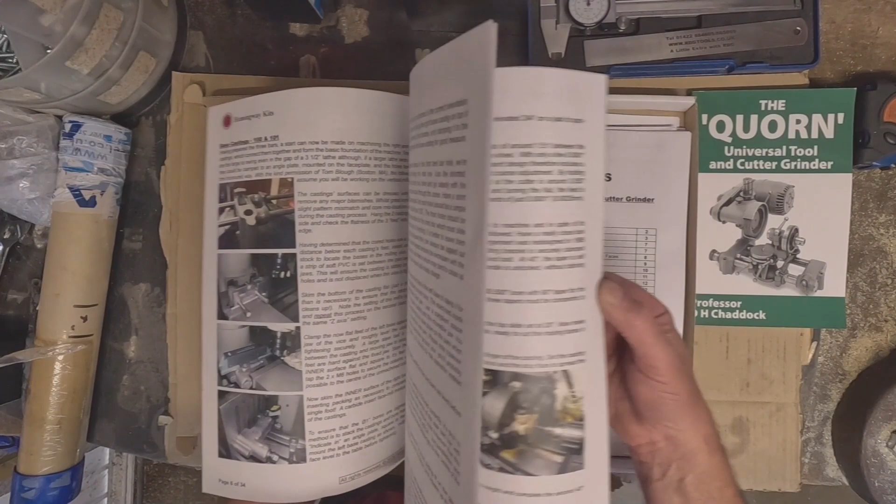So I went ahead during the end of lockdown to buy the kit. I'm glad it was inanimate objects and not something that needed walking or feeding, because it's sat there ever since. But anyway, we've got a full list of construction notes here to follow. I've had a quick look through, very extensive. I think you've got to read between the lines with some of these things. But we'll see how we go.

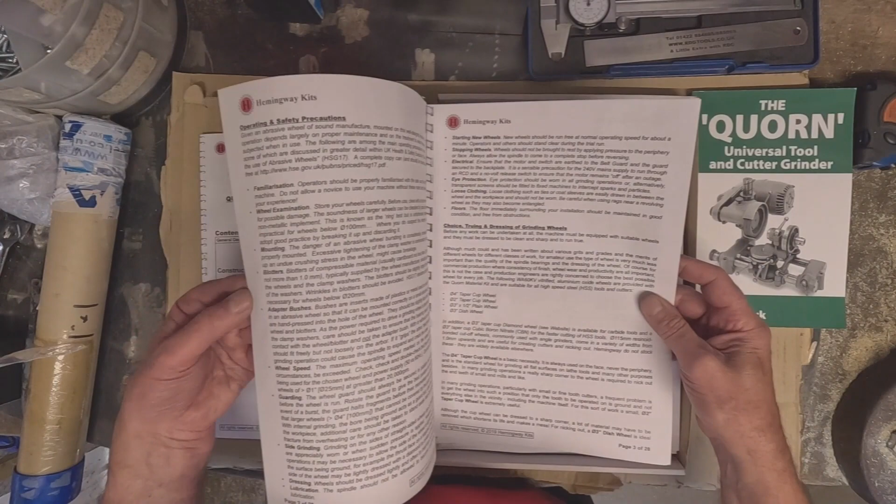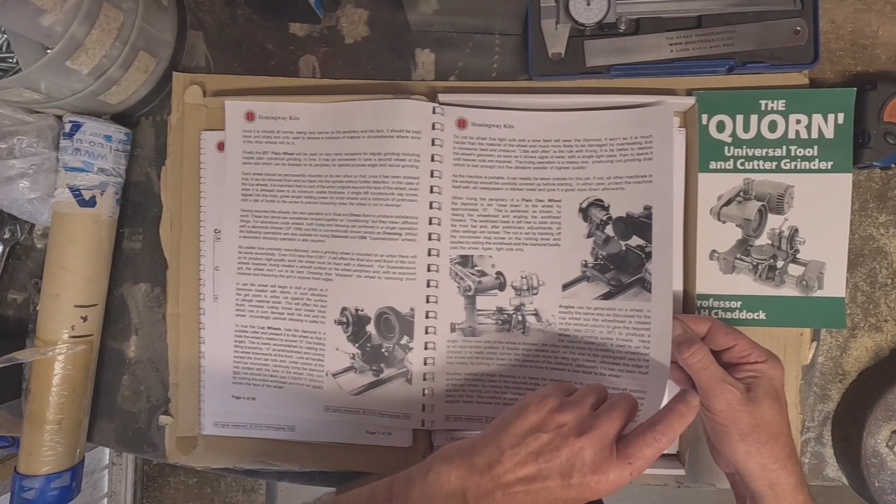We've got users notes. Obviously once you've built the Mark III Quorn, it's then going to run you through all of the operations of the Quorn, which at the moment look very complicated to me, but I'm sure some of it will come along. I've got plenty of high-speed steel to practice on anyway, and quite a collection of some old cutters.

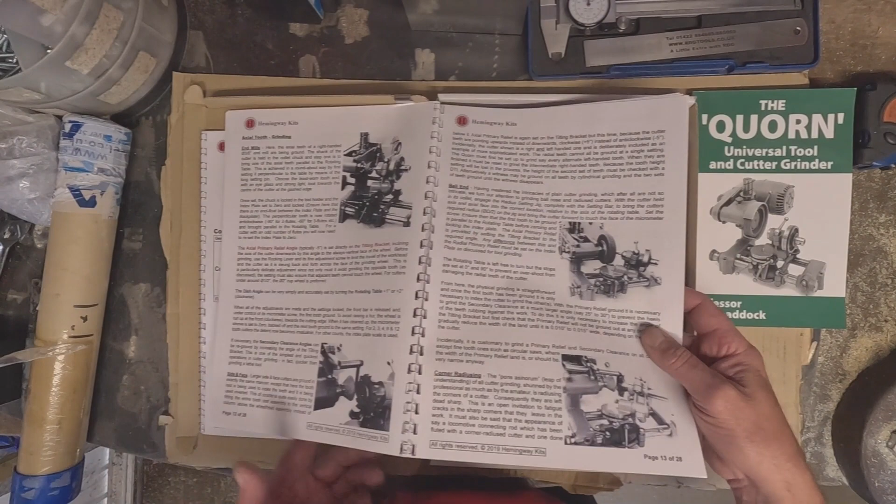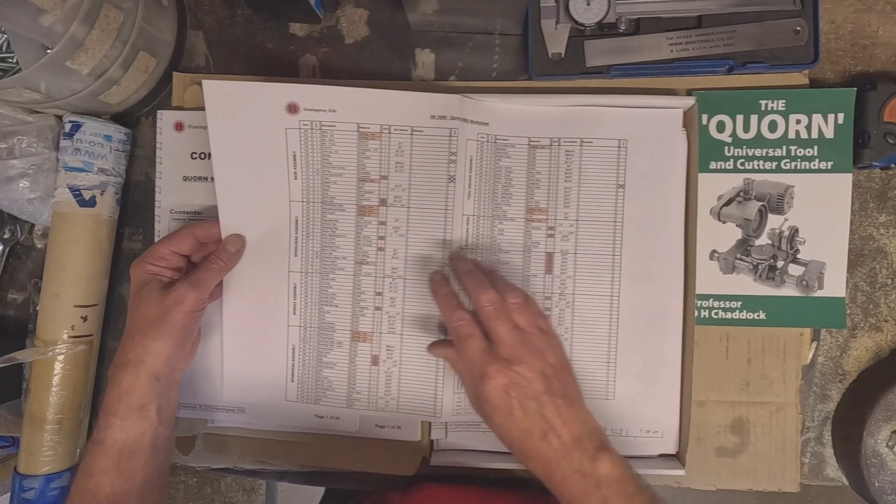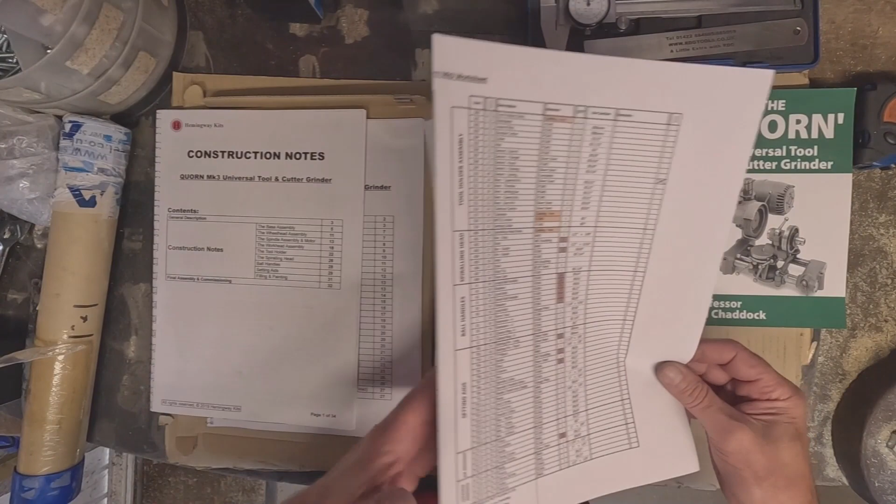You get a worksheet so you can mark down what you've managed to do, how you've gone along with it. I suppose you could put down your remarks, your time. I'm not going to go into the parts of the kit as such, because we'll just see them as they come along. Now the drawings are excellent.

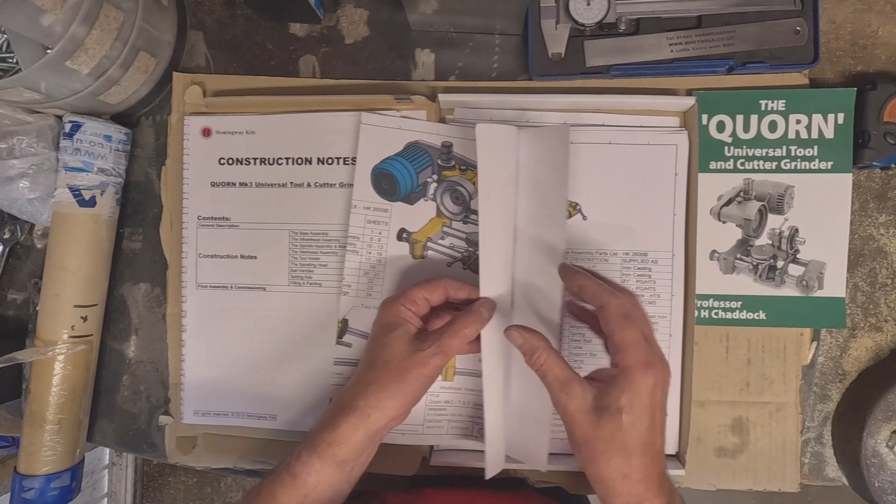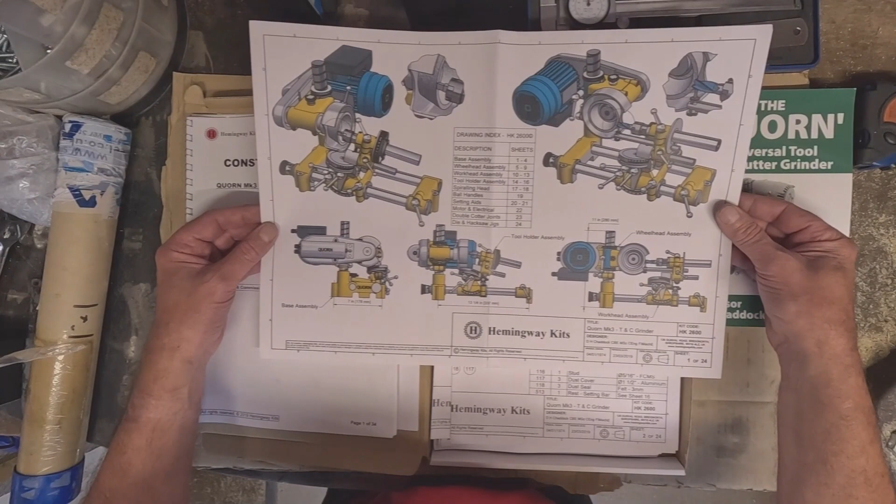There must be nearly 30 drawings. These are the full construction notes. I'm not going to show some of the more detailed ones, because these obviously belong to Hemingway, and if anybody wants these drawings, then please go and buy them. There are people out there that have put these things on the internet. I went and bought them. You're in a sense sponsoring them for their time and effort making up these drawings. Like I say, some of them are rather wonderful.

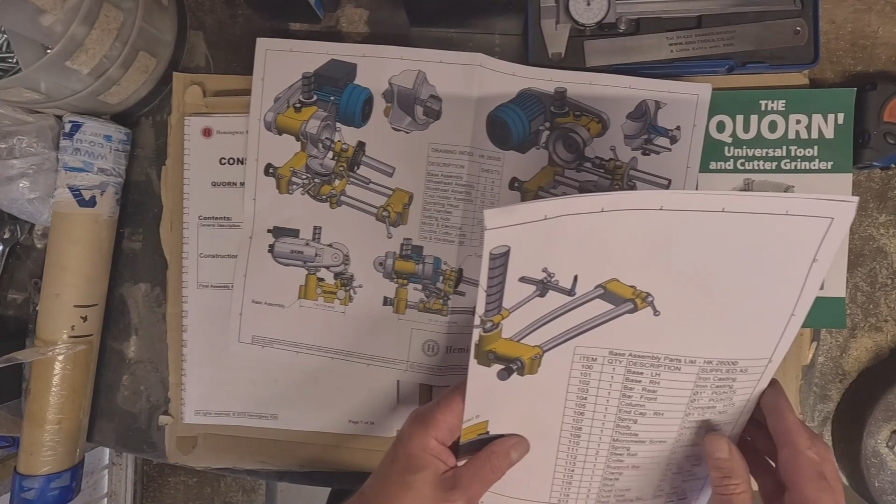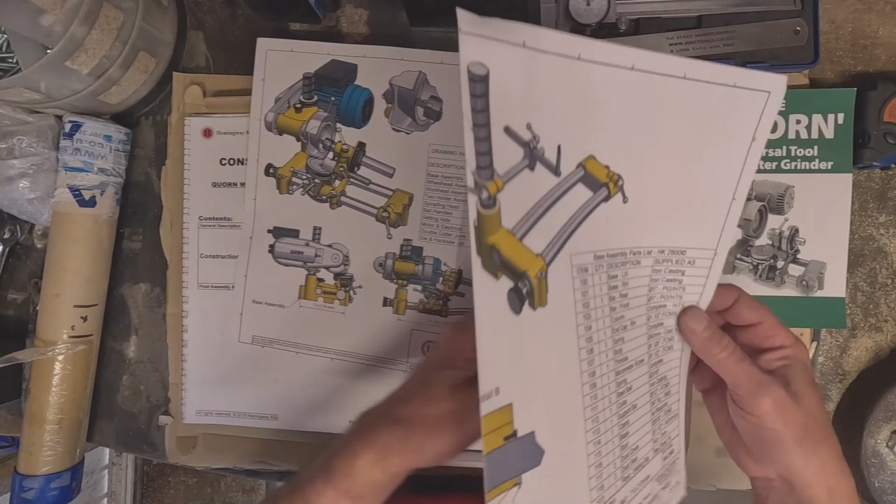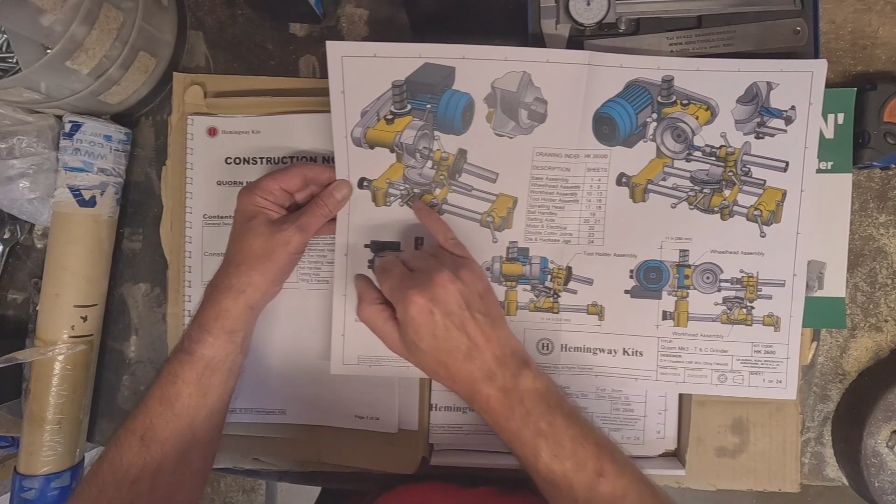Gives you an idea. This is with a different tool fastened on there, which again I will get into. But the first job is to start to do these bars. You've got a front bar and the rear bar, and the first two castings, these two here, is to prepare them by machining these inside faces underneath. Do the feet first to get them flat, and then the inside faces, and then you bore these bores out as accurate as you can for the two supplied bars that you get in the kit, that hopefully we'll get onto very shortly.

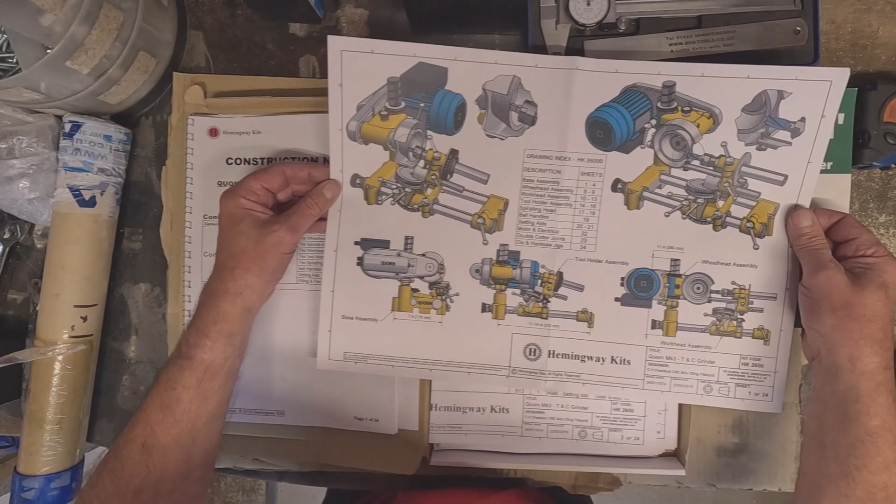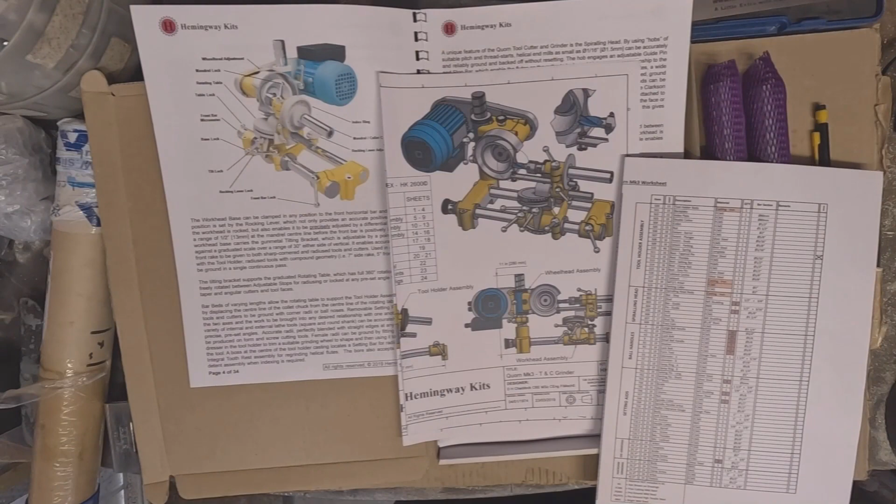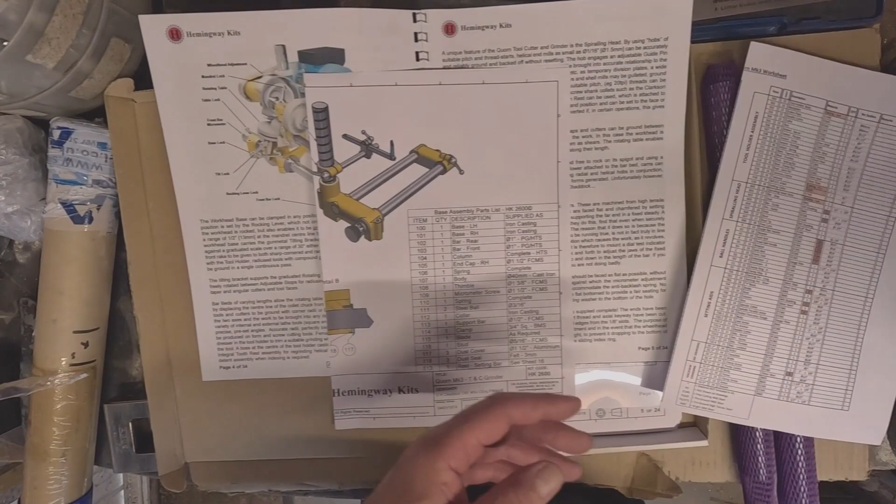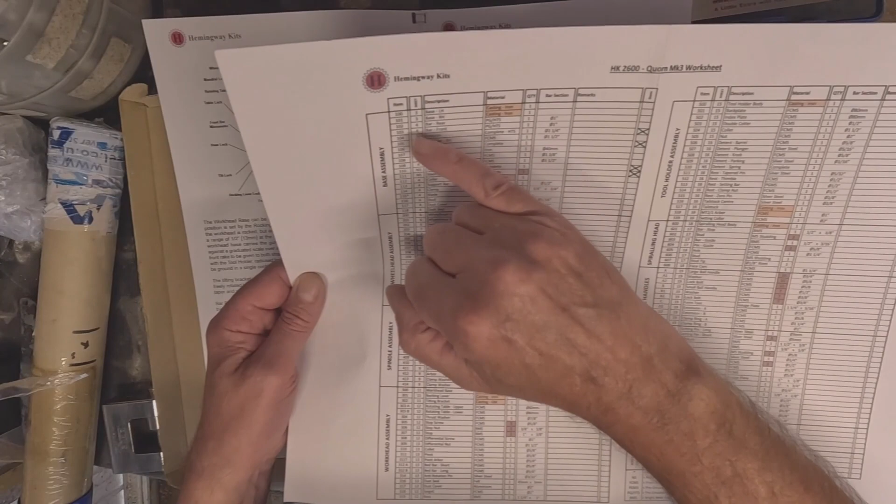Anyway, enough of all of that. I want to start to create, so let's see how we go. Right, it's time to make a start. So this is the first drawing that we get of the full assembly, which is all well and nice, but the first thing that is asked for are the base assembly bars. Now what I do like is on your notes, as well as the item numbers that are listed in the instructions, it does tell you which sheet they're on as well, because it's a bit of trawling through everything to find the part you're actually looking for.

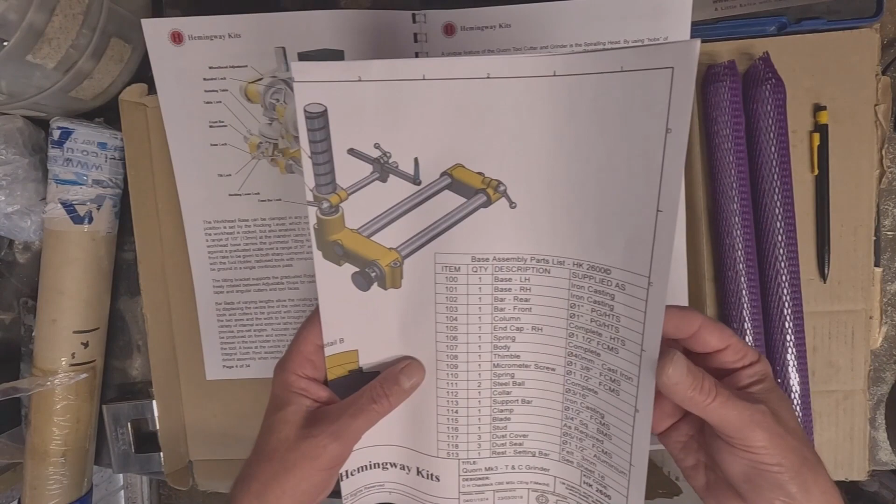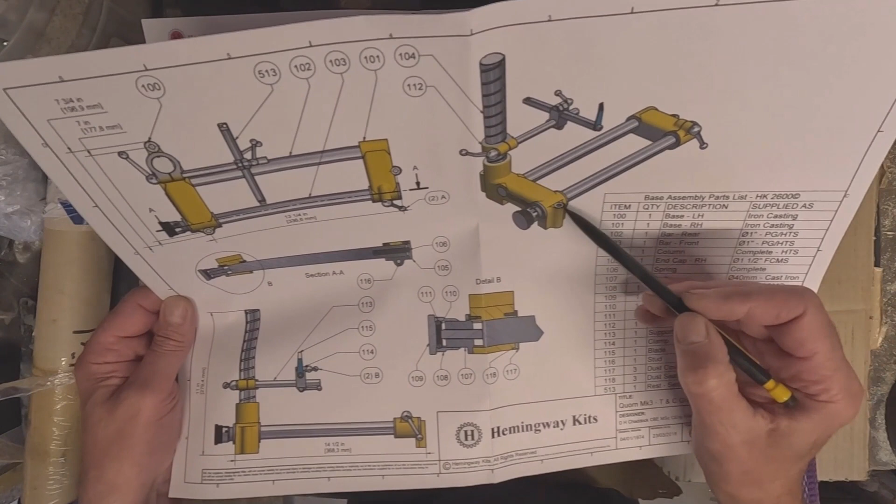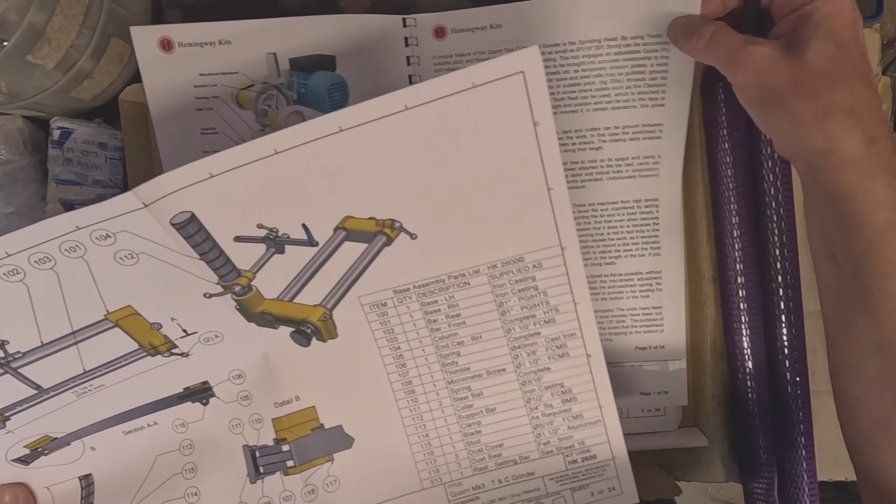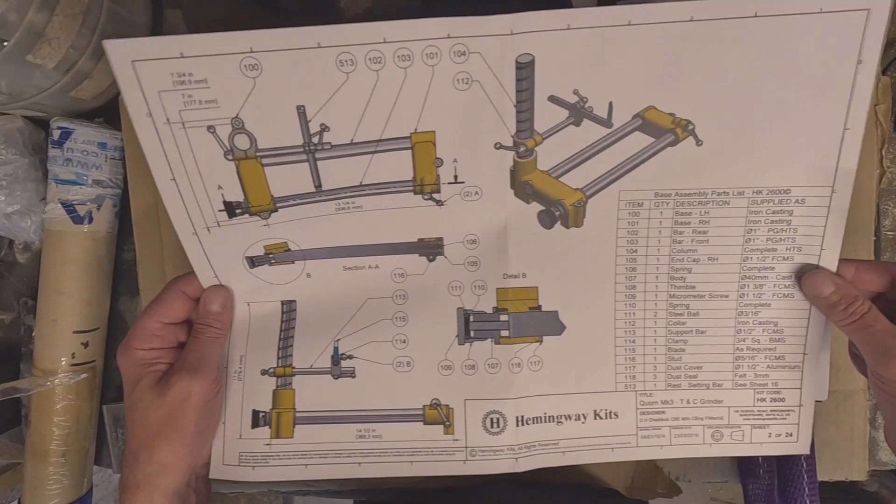Now, like I say, some of the drawings I'm not going to show because they belong to Hemingway. But what we're going to do, this is the rear bar and this is the front bar. These two are made out of ground precision 1 inch. I think they quote it as silver steel. We'll have a look. Yeah, ground stock, high tensile. High tensile, could be silver steel, same thing near enough. Although someone will probably say different.

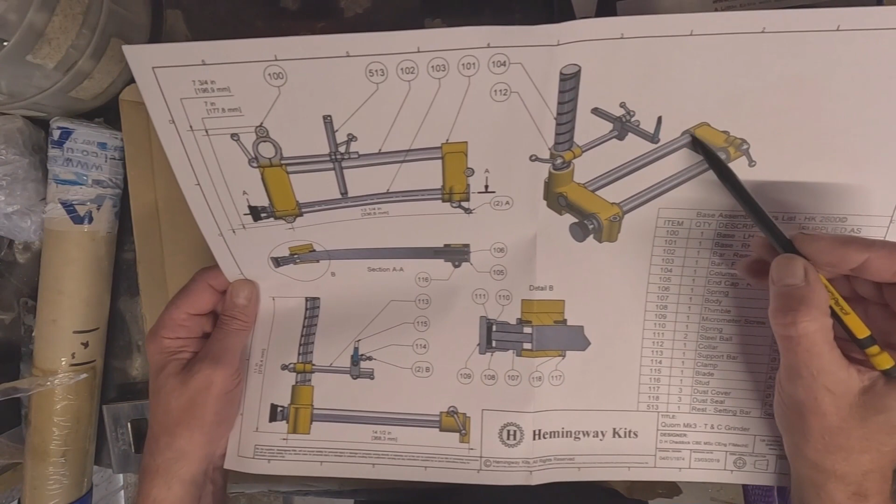So we've got the rear bar, we've got the front bar. Now these are identical in the diameter except the length. The back bar is just faced up to length with a chamfer on either end, but the front bar has a drilled hole in one end.

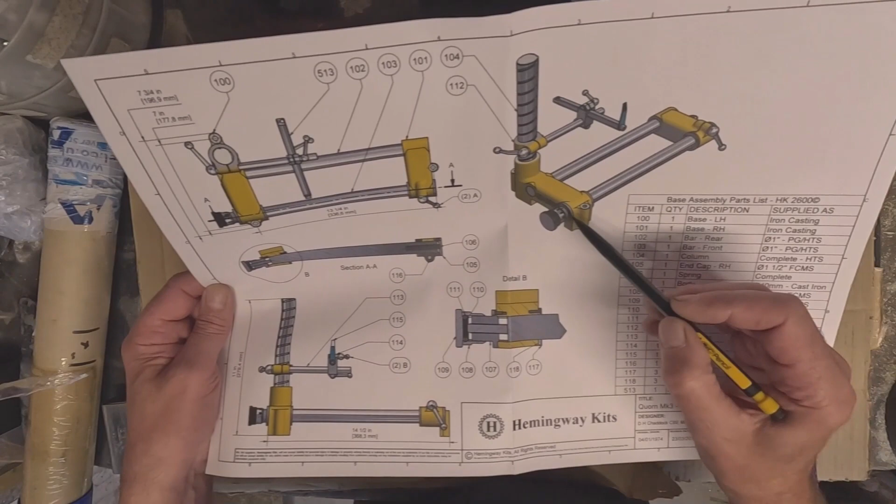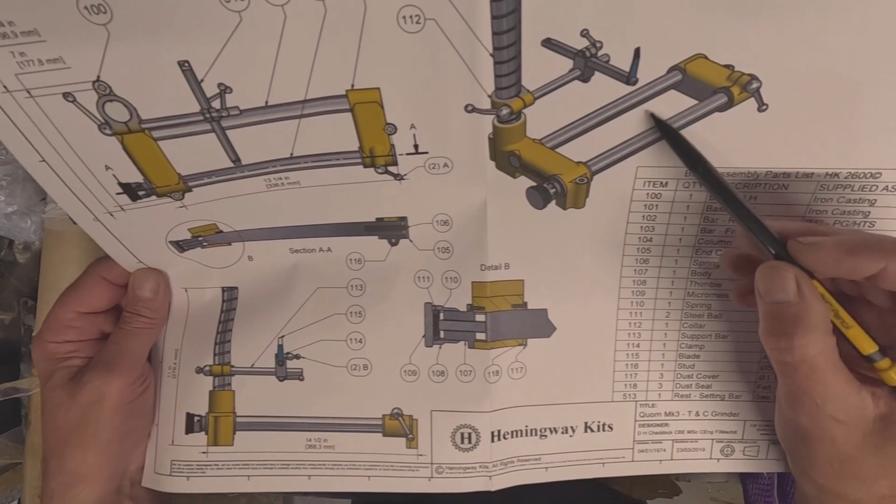It asks you not to put a centre in the other end because you've got this micrometer adjuster here that actually presses, the anvil presses against this, and this in turn moves this bar in and out to give you very fine adjustment on the assembly that goes on this rod.

Now, like I say, I'm not going to try and put these splits in. I'm going to go down the cotter pin. I think the front there, there's another one there, basically because I just want to. So the first thing is to flick these up.

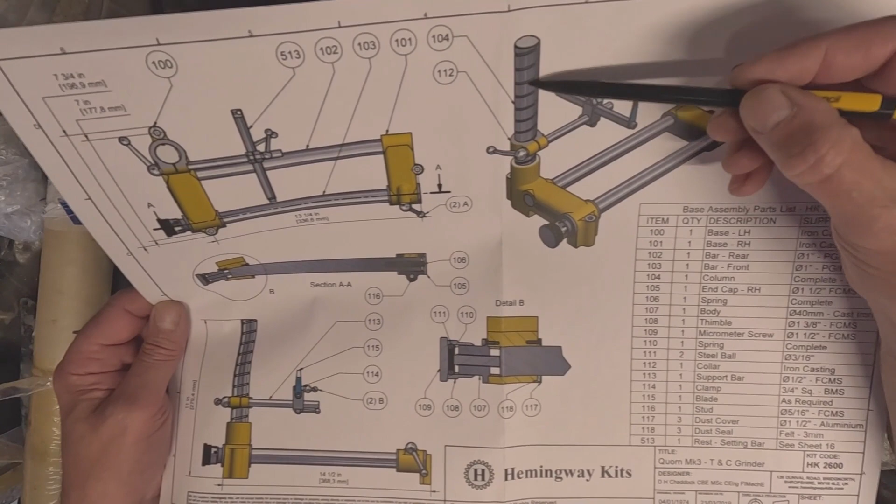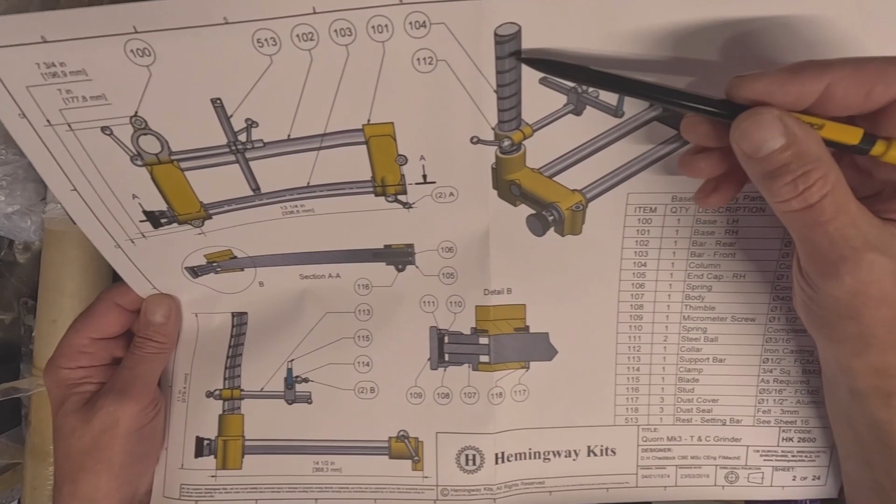Now they do say this central column here, this vertical column, in the old kit you had to turn and you had to work out with your ratios this pitch that they give you. And what they do now, they actually supply this with you. I'll show you that in a later vid. This has got the spiral around it, and it's also got almost like a keyway cut straight down the back for 2 grub screws that locate in this column.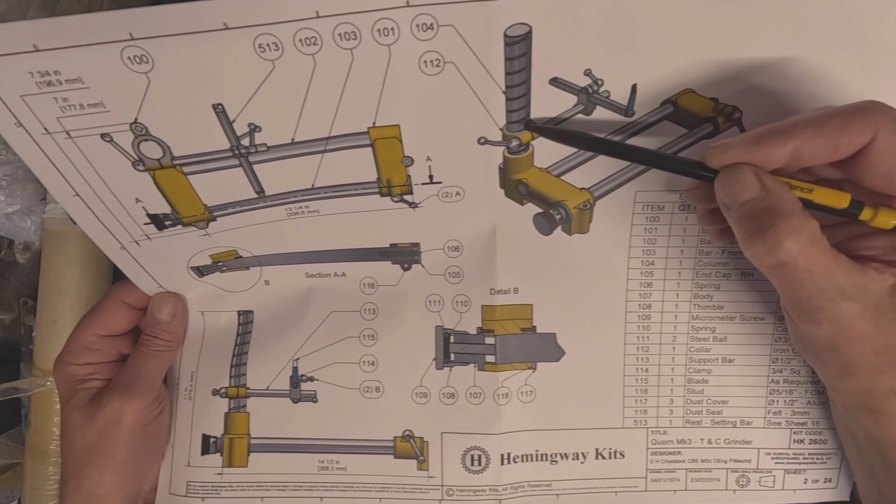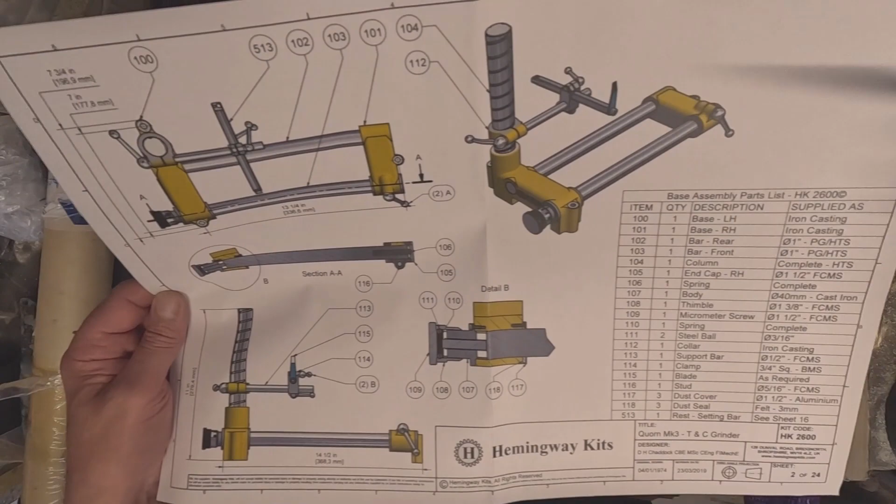And this basically is just to stop the head from falling down if you do undo it and you want to finely adjust the head, and it's just a safety feature, which I think is pretty good. So anyway, onto the bars, the drawings. Like I say, I'm going to face this end up, and there's going to be no pips.

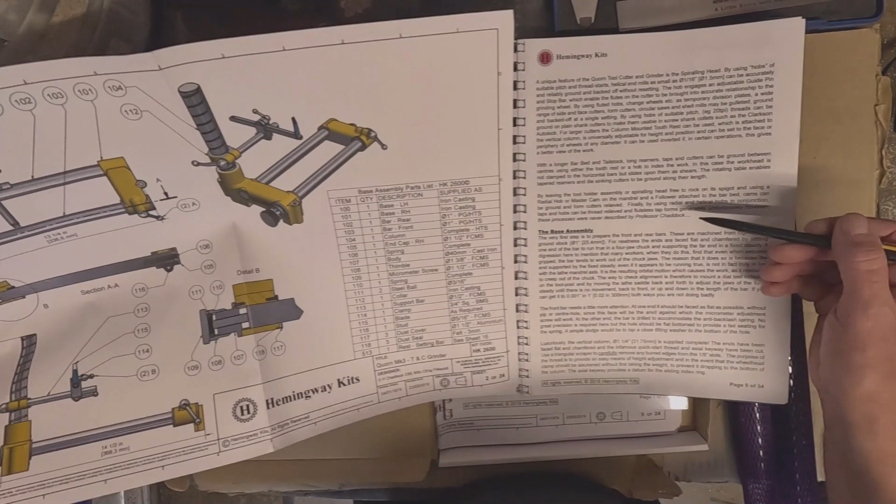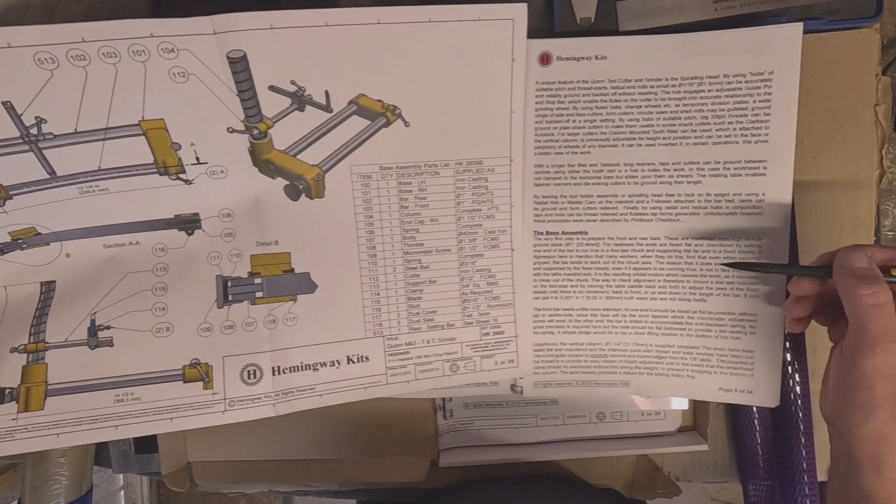Now it does mention in these instructions, because these instructions come from the original book, which I think is about the 60s or the 70s or somewhere. Because it was originally done on a small hobby lathe and they didn't have the spindle diameter to fit these bars down, a lot of these things were done on Myfords, and it does tell you about putting them in a four jaw. Now I'm lucky with my lathe.

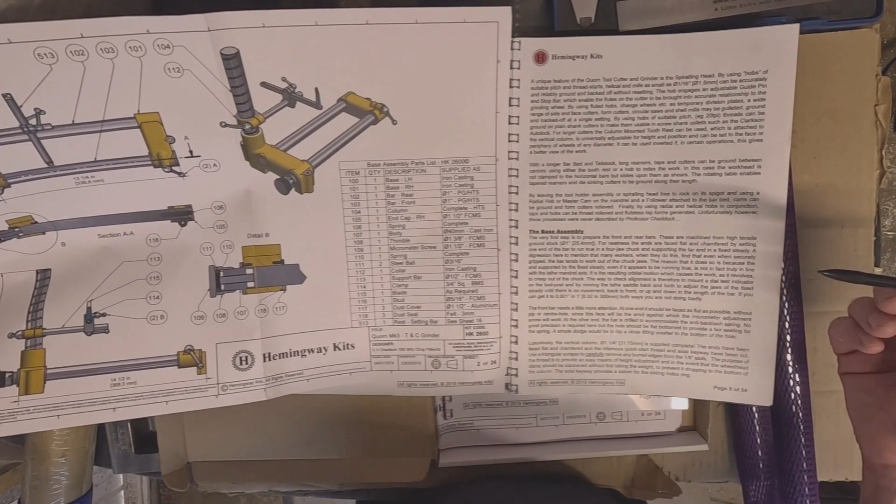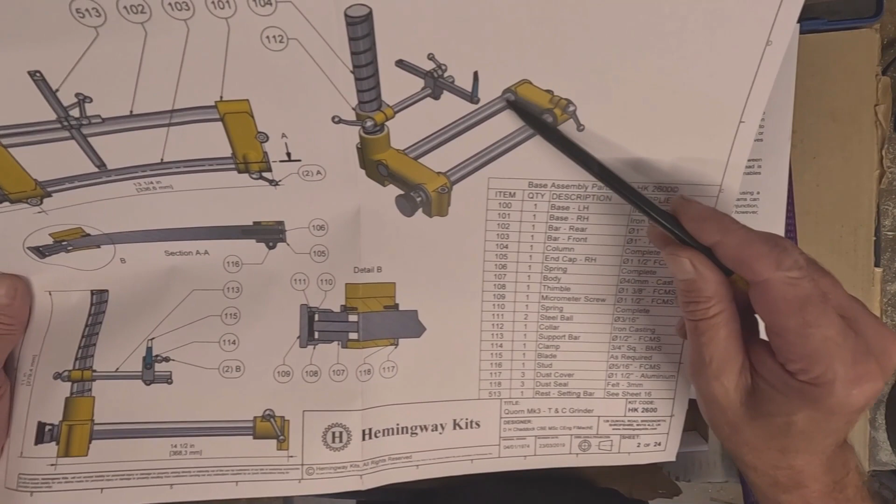I've got a bore of 2 inch, and I've also got a 5C collet chuck, which I'm going to put on with a collet and hold these bars, which for me will be a lot more precise in machining the ends, and I do not have to put centres in anything. This end here does, sorry, no, it's that end. No, it's not, I'm going mad now.

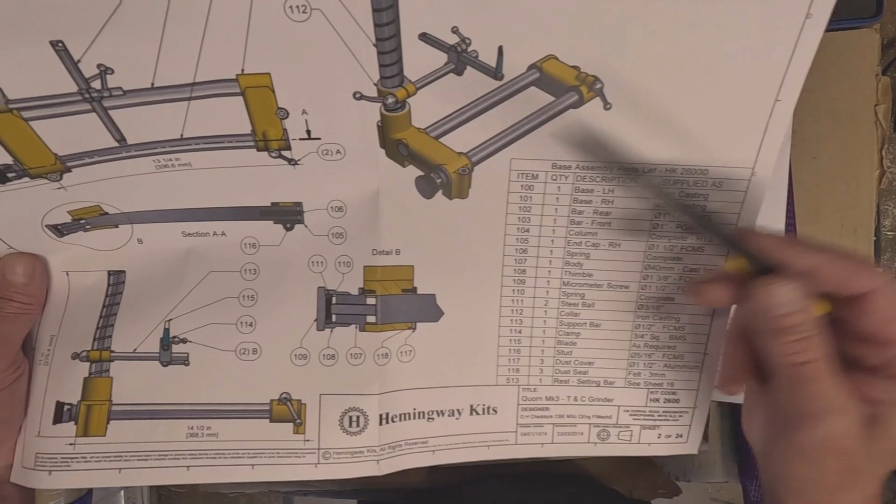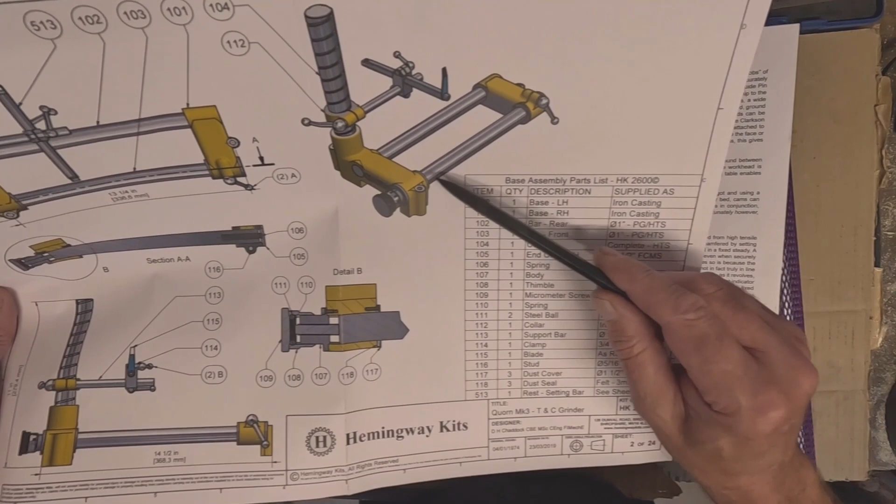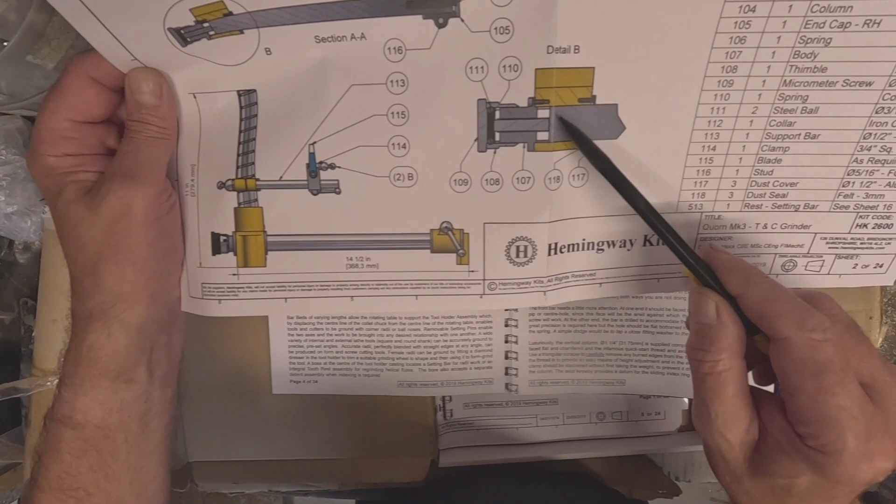It is this end, it does have a flat bottom drilled hole in the end with a spring that causes tension with this micrometer adjustment here. You can see in the drawing there how this will have a plunger on there and will give you a very fine feed for very small adjustments. Right, that's that. Let's go over to the lathe.

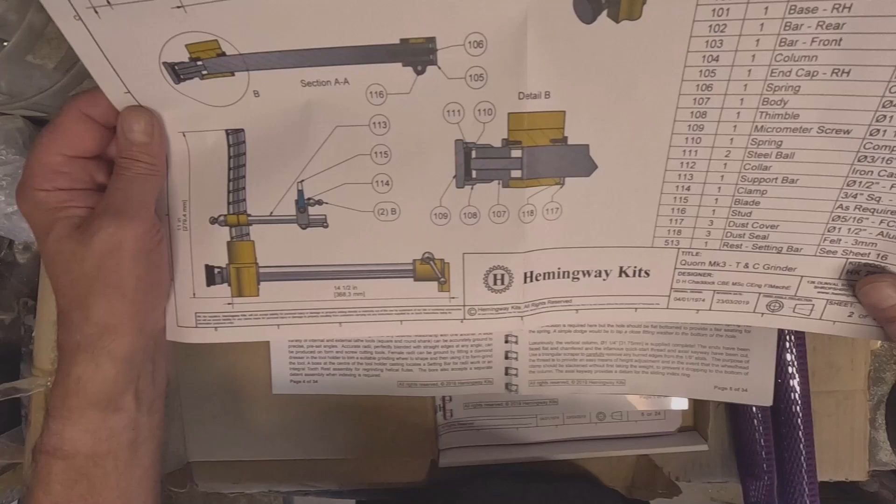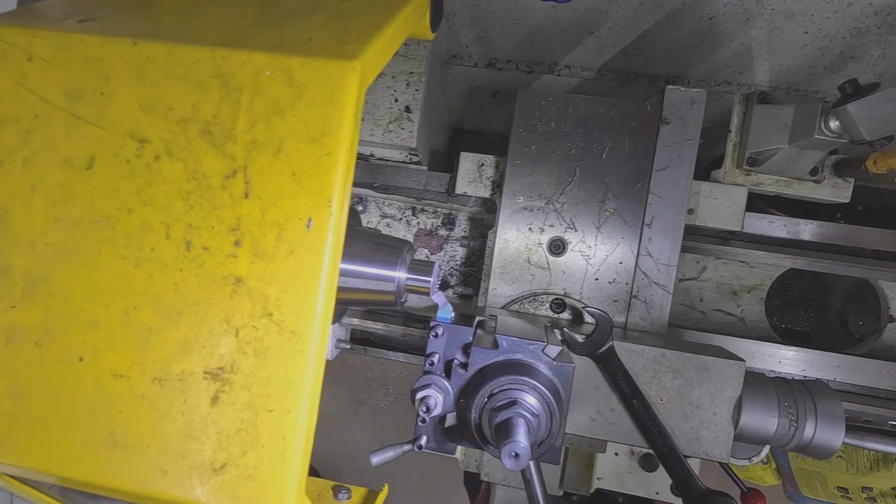Okay, so I've mounted my chuck and I'm just facing off the last bar here. I couldn't see the point in showing the other bars because all we're doing is facing them up. I'm using a small carbide brazed tool because I find it's cutting the high tensile bar better than anything else. Just put a small chamfer on the end. I'm not really sizing the chamfer, I'm just putting it on by eye, about a millimetre, 30-40 thou.

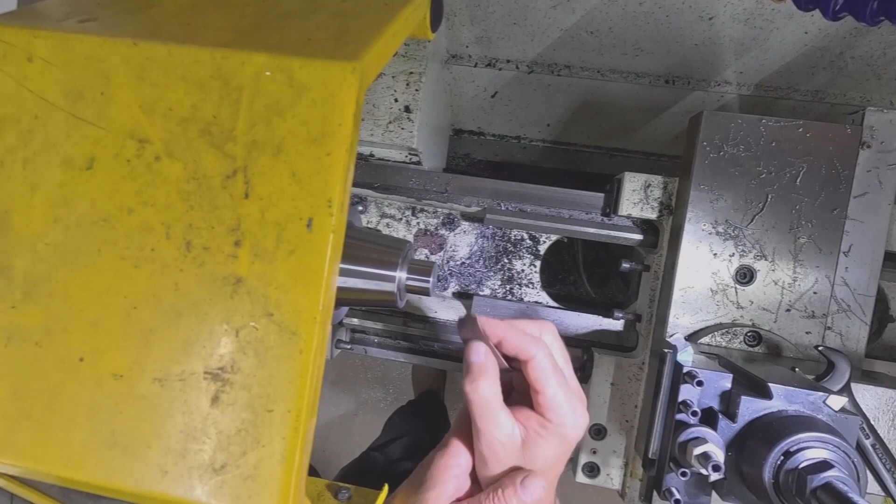Just take the edges off with a file. And polish the ends up with a little piece of emery. And once I've done this, it's over to the bench, out with the vernier, and we'll measure it up.

You have to excuse me for my complete lack of health and safety in the tool being in the tool post, but old habits do seem to die hard.

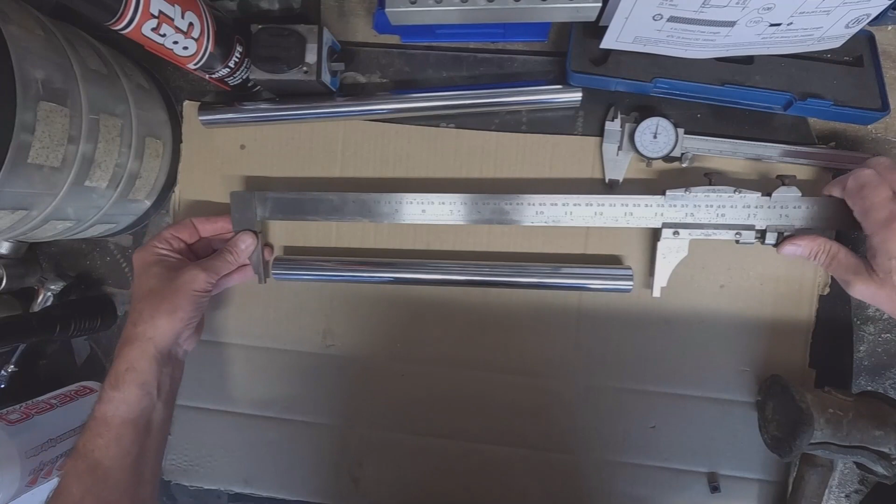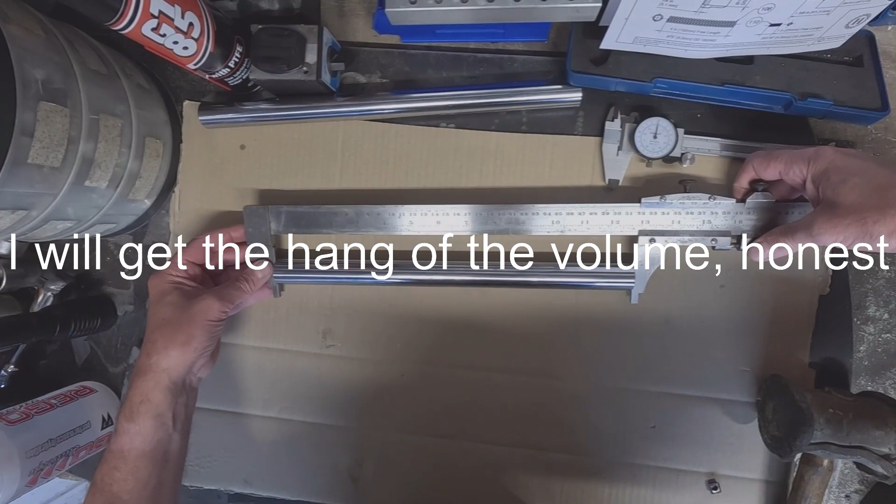Okay, this is the final bar to be faced up, and I'm just checking the overall measurement. And after this, the drawing's then asking for a 13/32 hole to be flat bottomed, about 2.5 inches deep. This will take the anti-backlash spring in one end for the front bar that has the micrometer setting on the other.

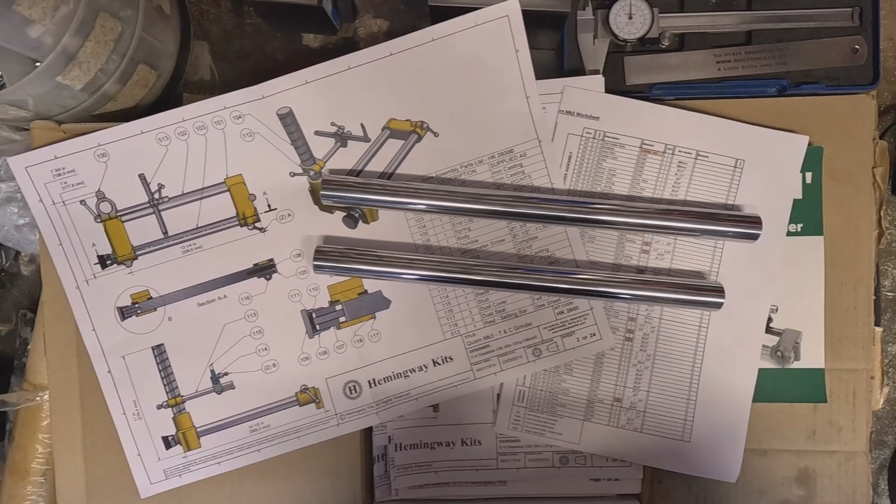Right, it's the first two pieces done. This is the front bar, flat bottom hole in the end, ready for the spring, ready for doing the base castings. This is the back bar.

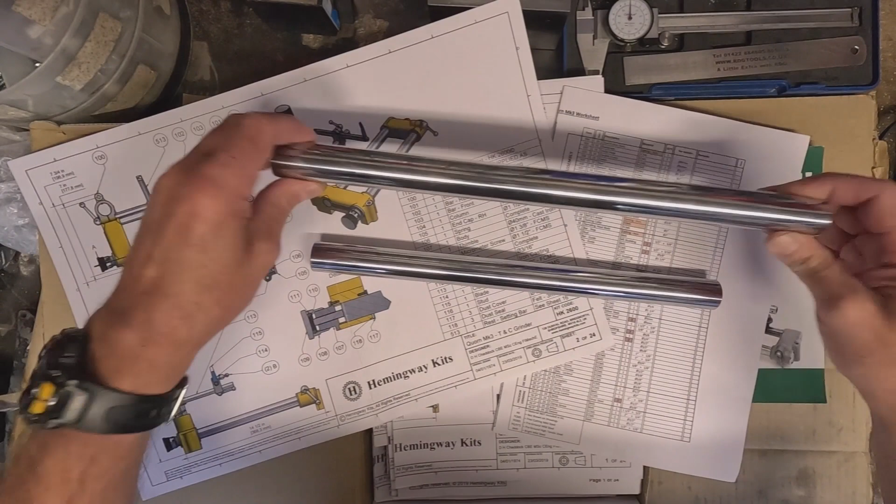You'll have to excuse my video editing skills, everything's a learning curve. It's either going to go down like a lead balloon or, well, we'll wait and see.

Anyway, next will be the castings.